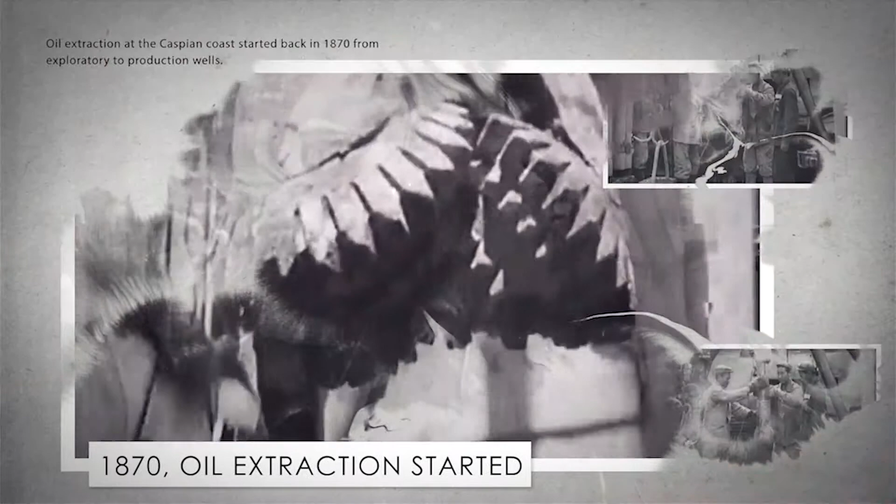The Caspian Sea is a pearl of Europe and Asia. For as long as anyone can remember, its waters have been bringing life to people living at the coast. The Caspian Sea has always been famous for rich fishery resources, but it houses something even bigger: vast deposits of oil and gas. Oil extraction at the Caspian coast started back in 1870, from exploratory to production wells. In 1901, more than half of the world's oil production was coming from the Caspian oil fields.

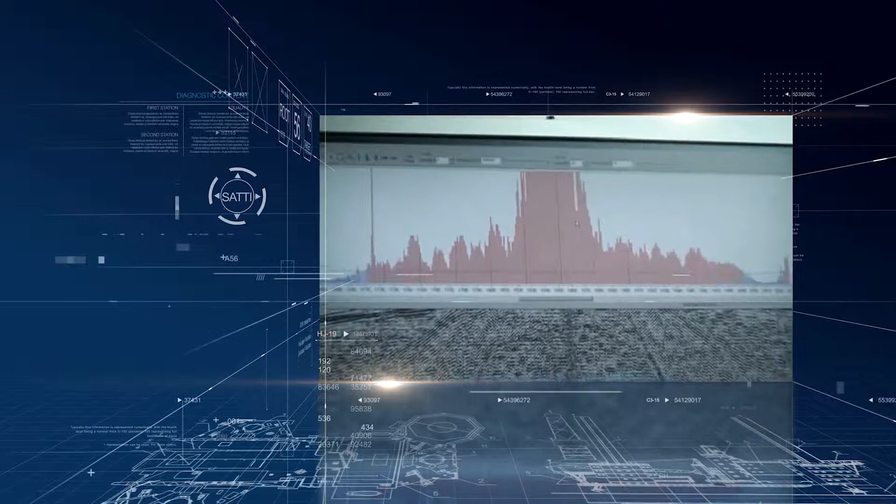Oil exploration and production methods in the early 20th century allowed extracting oil only onshore. The first offshore oil structures opened in the 1950s, bringing new technologies into the region. Northern and central parts of the Caspian Sea, now belonging to Kazakhstan and Russia, had not been explored well at that time. Detailed exploration started in the mid-1990s and led to the opening of the richest fields, making Kazakhstan third in the world in oil and gas reserves.

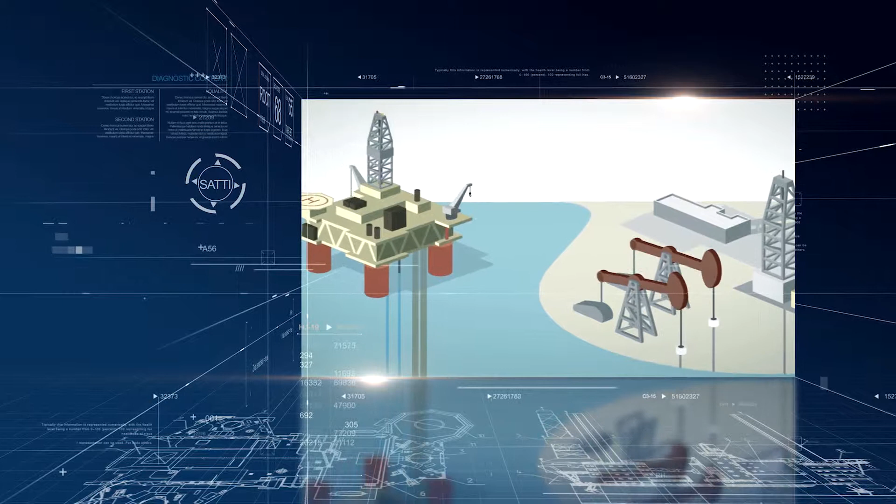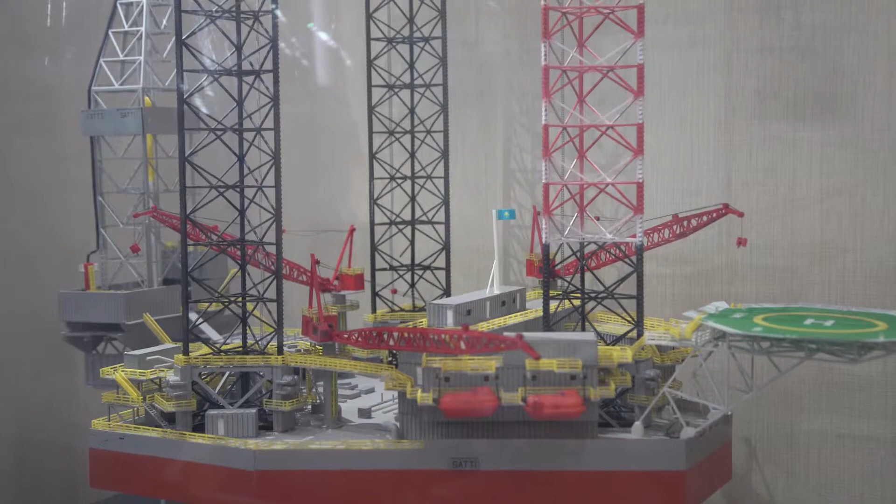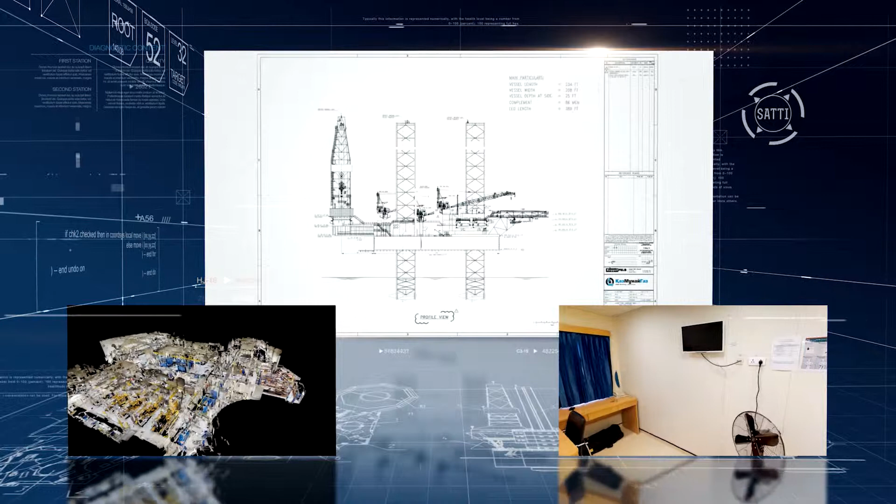Currently, almost all onshore fields are in operation, and many of them are depleted. The situation prompted exploration of offshore oil fields. Considering an increasing demand for oil field development, in 2012 the national company KazMunayGas encouraged KMG Drilling and Services to proceed with construction of the first jackup rig, later named SATTI, translated from Kazakh as successful. In 2017, all testing and pre-commissioning activities were completed, and the rig is fully ready for operation.

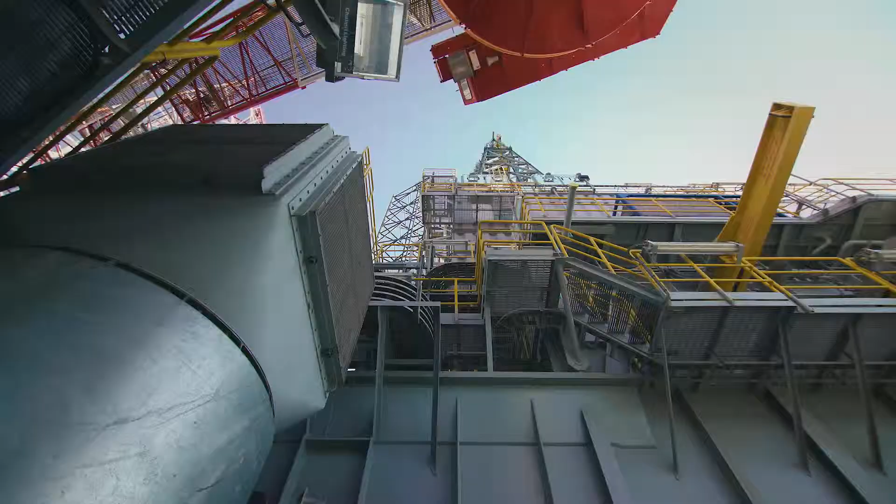SATTI is designed by Keppel FELS as a Type B jackup drilling rig. SATTI is a non-propelled drilling rig, International Maritime Organization (IMO) certified and classified by the American Bureau of Shipping (ABS) as a self-elevating floating drilling unit. IMO number is 9668207, and the call sign is UNDH. The port of registry is Aktau, Kazakhstan. SATTI is owned by KMG Drilling and Services.

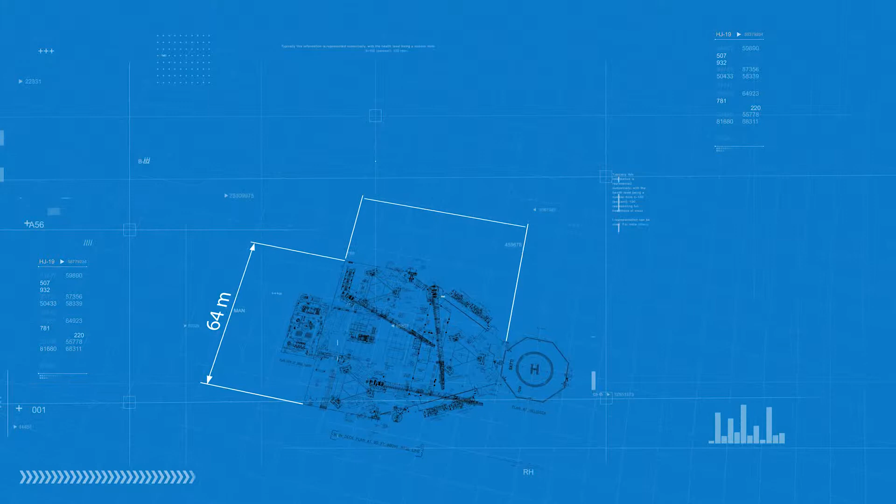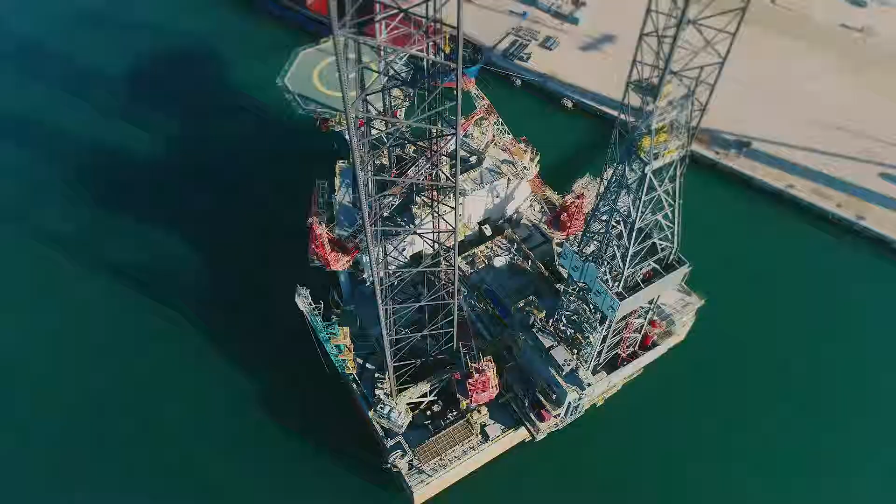SATTI's hull is 72 meters long and 64 meters wide, with three 119-meter-tall legs at a displacement of 10,800 tons. The rig is designed for operation in water depths of 5 to 80 meters and can drill to depths of 7,000 meters. The transit draft is 4.4 meters.

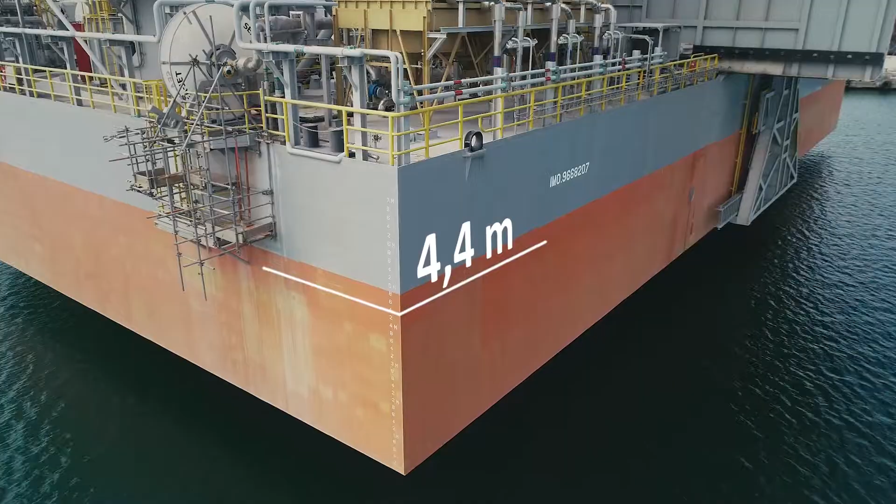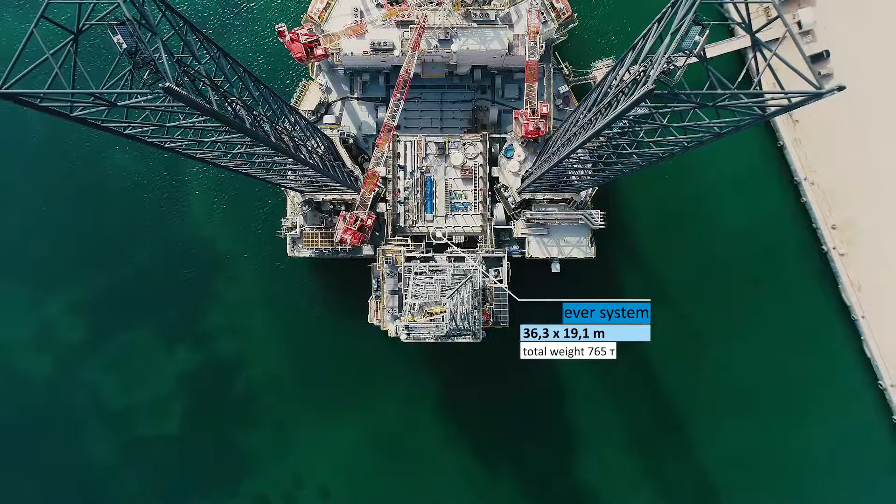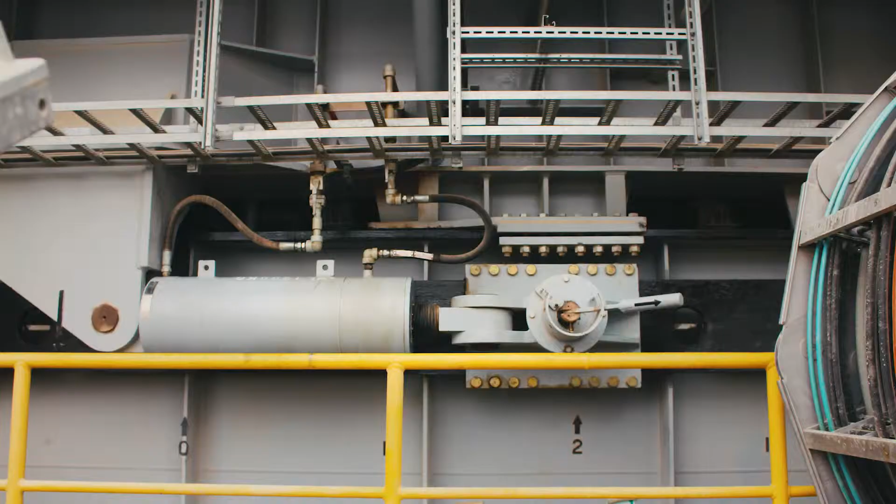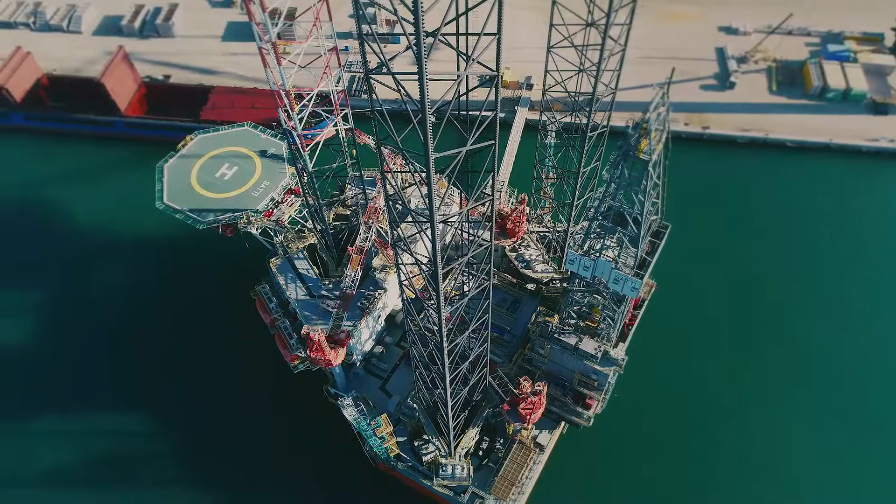The cantilever is located at the aft end of the rig. It is 36.3 meters long and 19.1 meters wide, with a total weight of 765 tons. The drill floor is located above the cantilever. The cantilever can move forward and aft. The rotary table's center line can overhang 18.29 meters from the aft of the rig. The drill floor can move 4.57 meters left or right from the center. The main drilling equipment of the rig is located here, namely the drill floor, derrick, top drive system, drawworks, etc. These features allow for cluster drilling while jacked up in the same position.

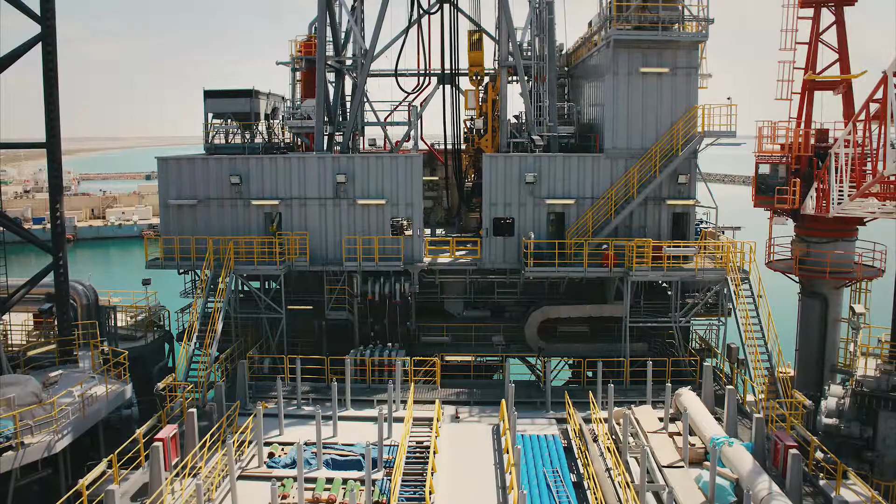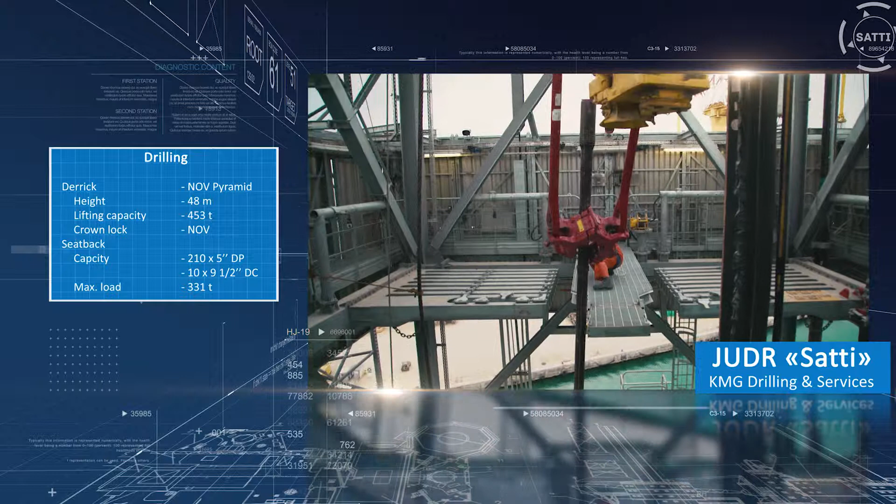The derrick is 48 meters high with 453 tons capacity and equipped with an NOV crown block. The setback area has a capacity of 210 drill pipes with 5 inches in diameter and 10 drill collars of 9.5 inches in diameter.

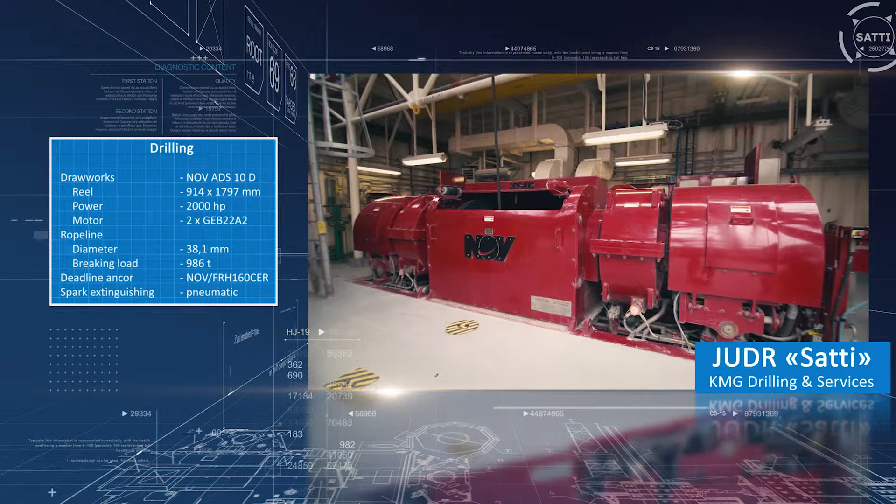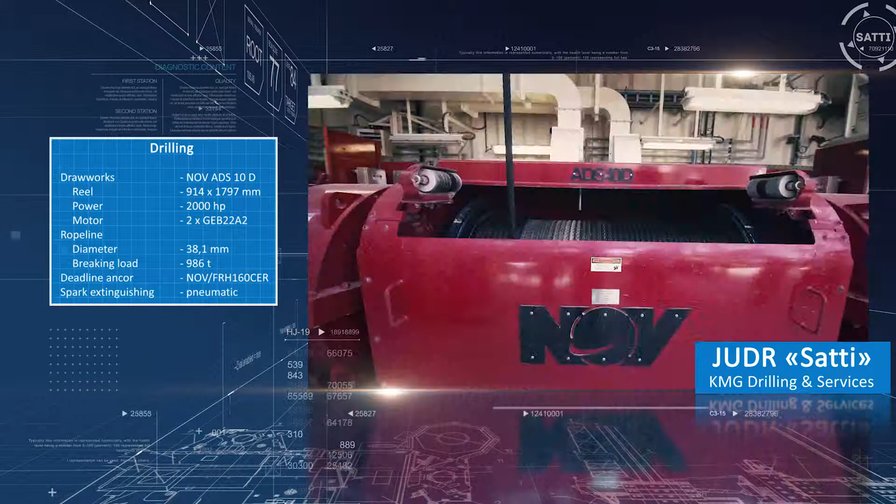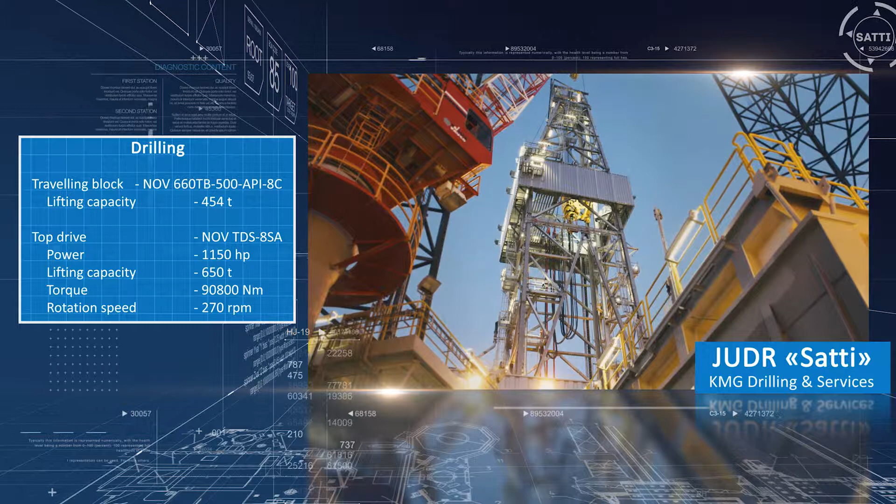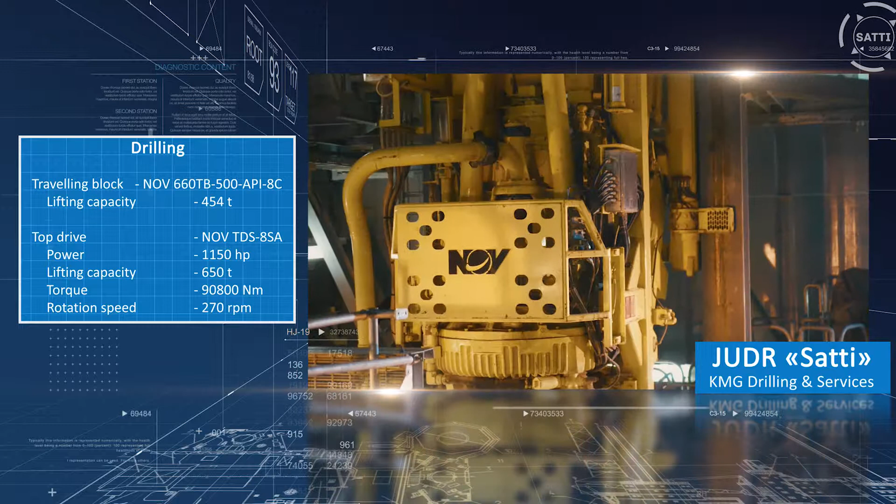The NOV Drawworks is a 2,000 horsepower ADS 10D model, equipped with an Amphion-controlled electrical braking system with air and water cooling. The NOV Traveling Block has a load capacity of 454 tons. The NOV TDS 8SA top drive has 650 tons load capacity, 1,150 horsepower, and 270 rotations per minute.

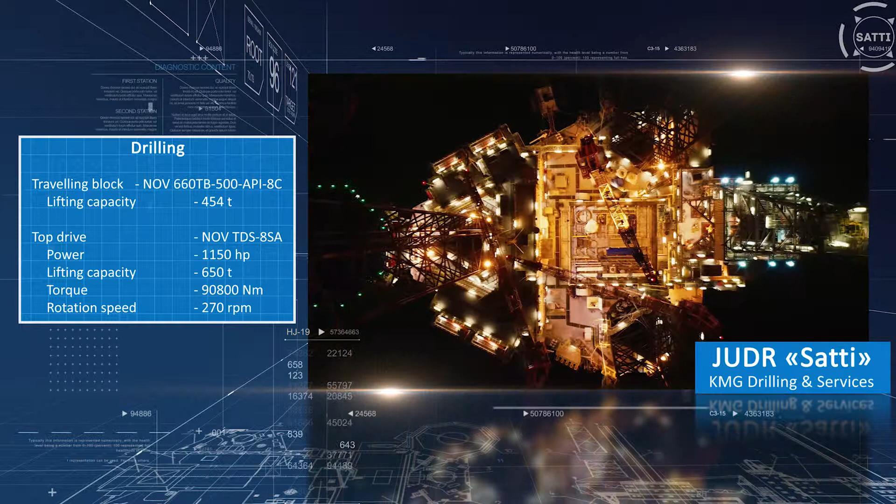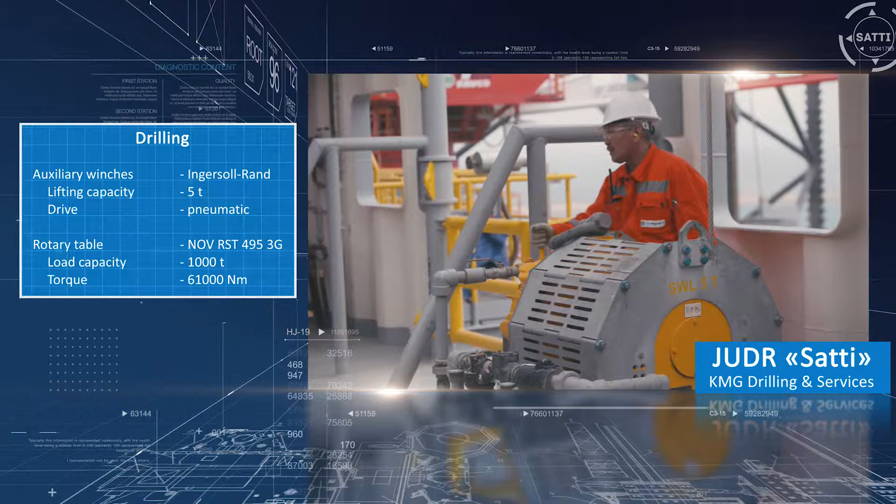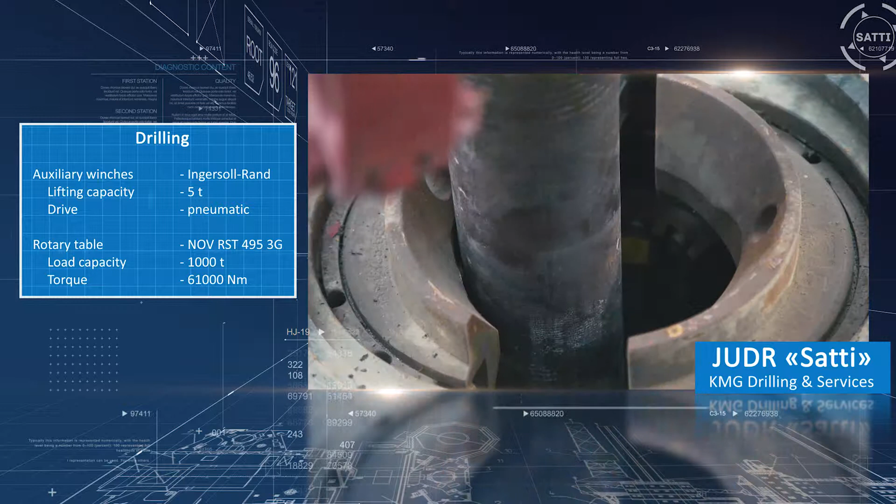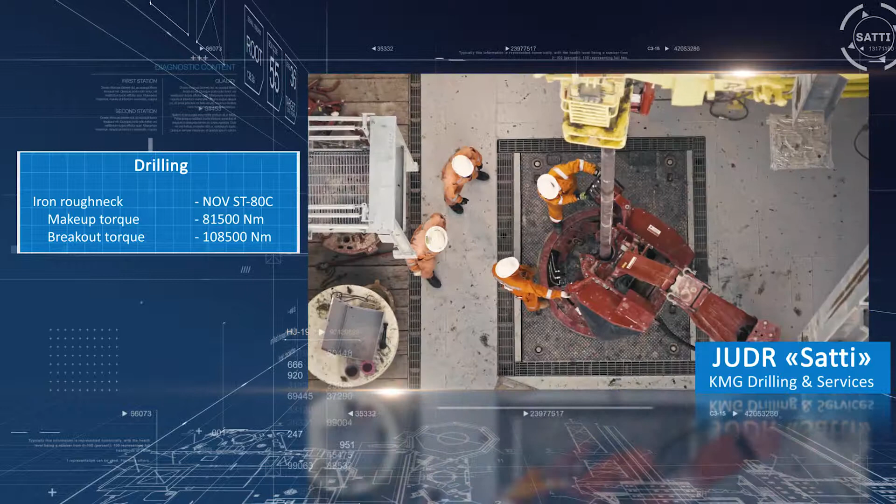For any auxiliary works and cargo hauling, 5-ton lifting capacity Ingersoll Rand air winches are installed on the drill floor. The NOV Rotary Support Table, RST-495-3G, 49.5 inches, is equipped with a removable PS21 power slip. The NOV ST80C Iron Roughneck is installed at the drill floor and has a maximum makeup torque of 81,500 Newton meters and breakout torque of 108,500 Newton meters.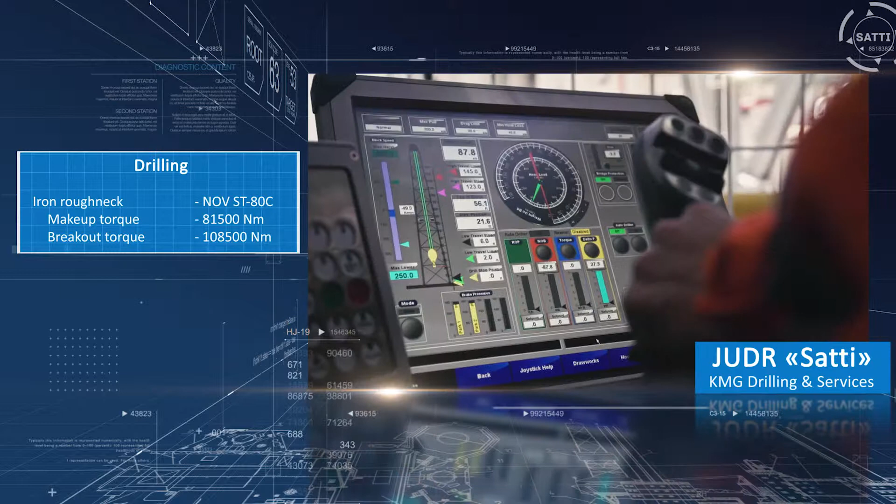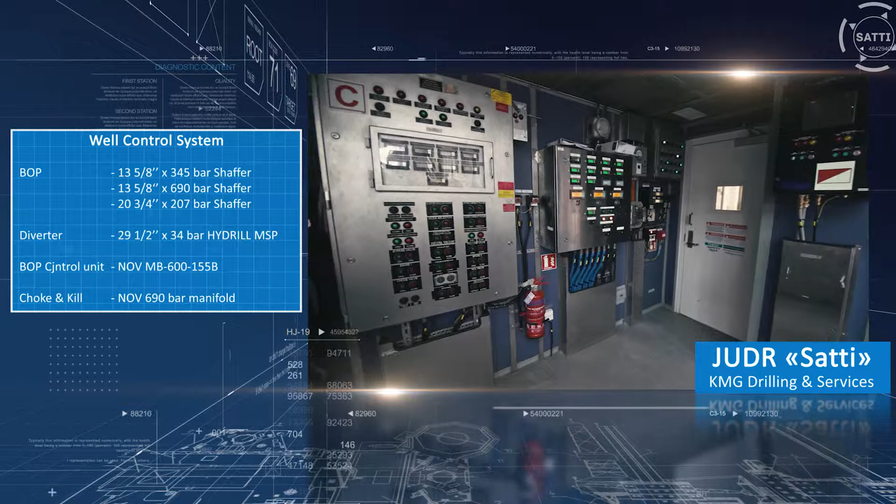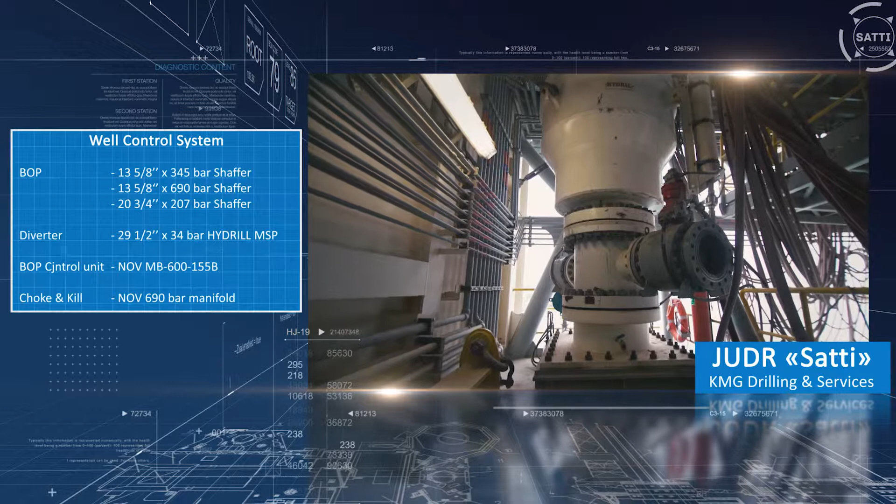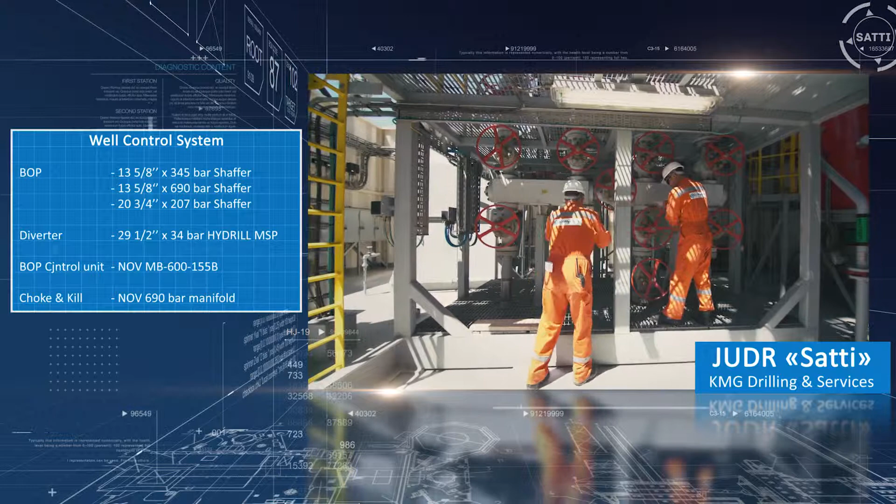The driller's cabin is equipped with an Amphion drilling control system that controls and displays information on the drilling equipment operation and status of drilling operations. There are also control panels for well control equipment, fire and gas detection, CCTV monitoring, and all intercom systems. Blowout prevention equipment includes Shaffer 29.5-inch Hydril diverter, 20 3/4 and 13 5/8 preventers, and NOV choke and kill manifolds which are able to shut the well up to 690 bar.

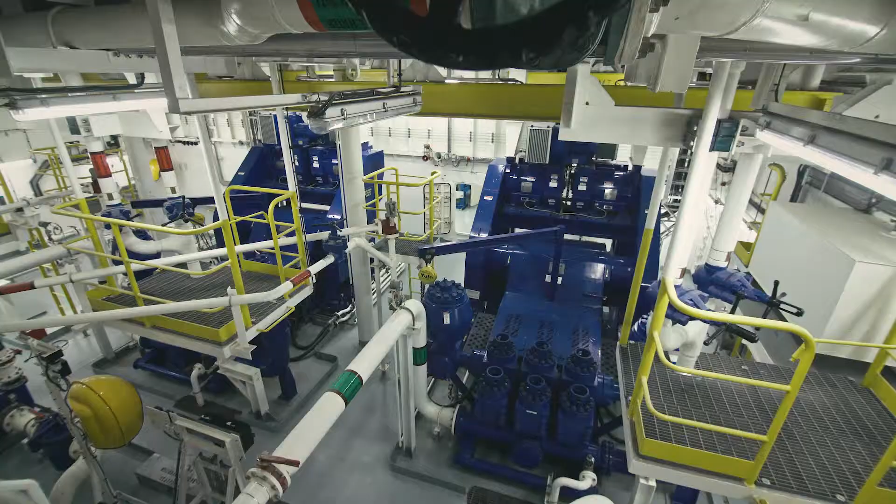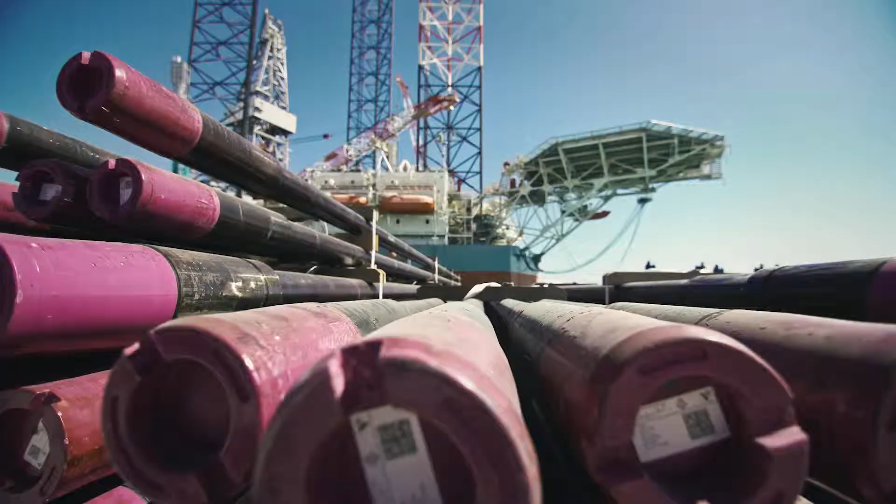NOV 12P 160 mud pumps. Rated pump speed is 120 strokes per minute. Liners from 4.5 to 7.25 inch. Rated pressure 345 bar. An adequate supply of drill pipes and drill collars are available on SATTI. The rig has drill pipes 4 and 5 inches and drill collars from 4 3/4 to 9.5 inches in diameter.

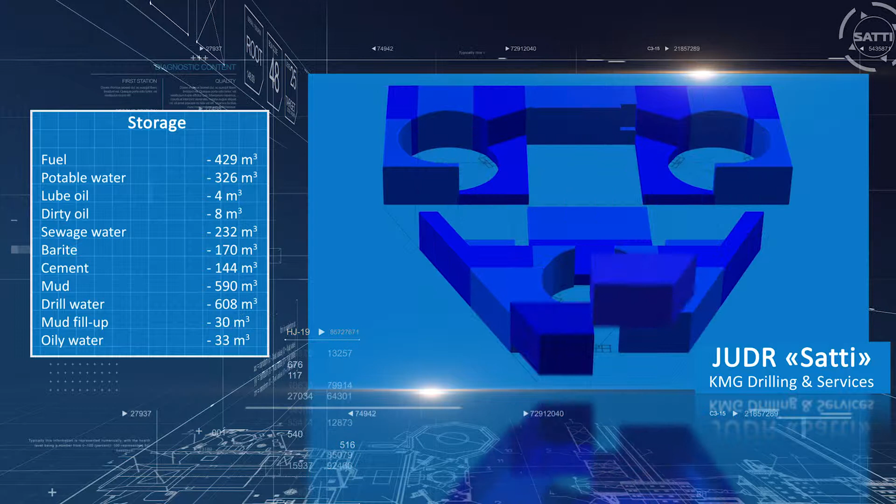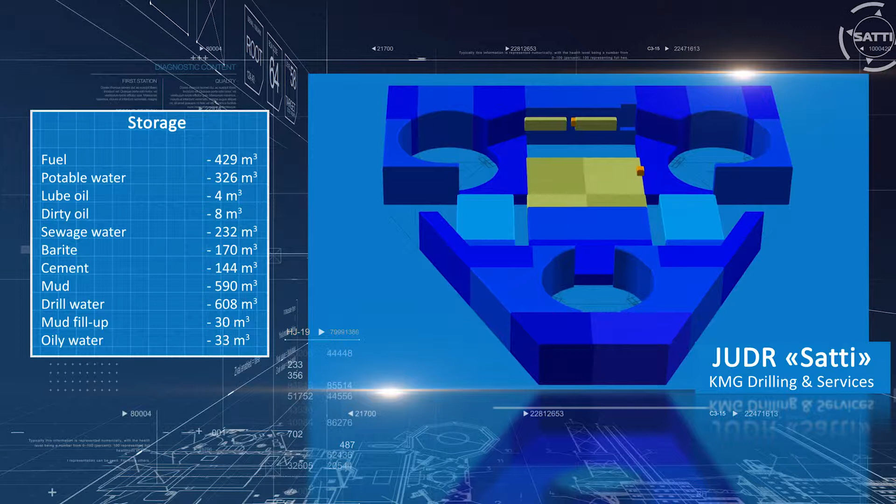Lower level of the hull is designed to store process fluids. There are 2 main, 2 service, and 2 settling tanks for diesel fuel. 2 freshwater tanks with a capacity of 326 cubic meters. 2 4 cubic meter tanks are used to store lubricating oil for diesel generators and mud pumps. Waste oil is stored in an 8 cubic meter tank. For gray and black water collection, there is a 232 cubic meter tank.

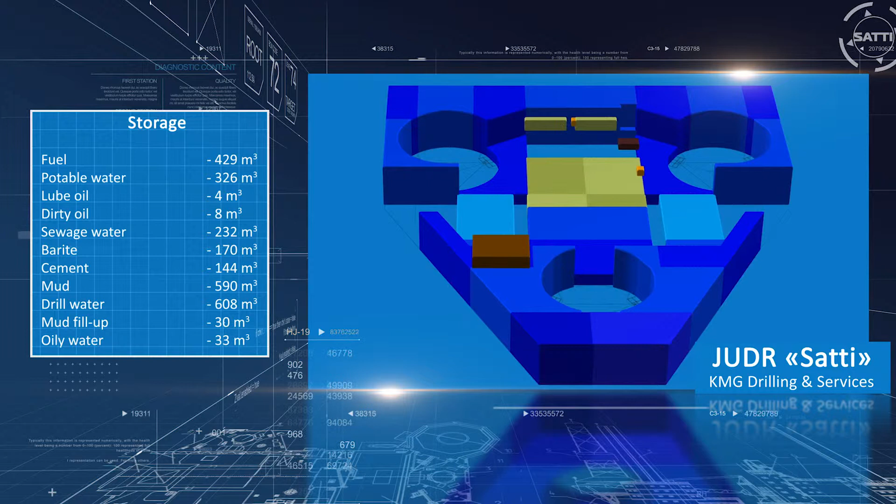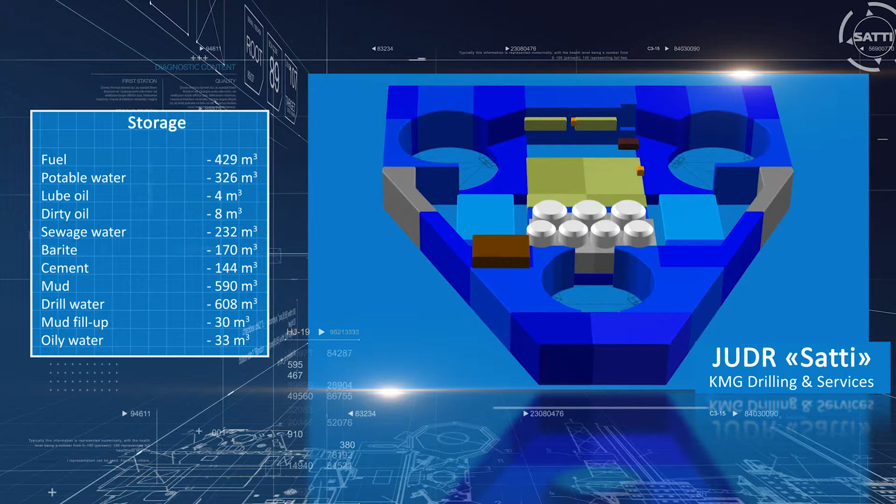For the preparation of weighted drilling mud, 10 mud tanks with overall capacity of 590 cubic meters are installed. 4 bulk tanks for barite with overall capacity of 170 cubic meters, 3 bulk tanks for cement with an overall capacity of 144 cubic meters, and 2 drill water tanks with a total capacity of 608 cubic meters are available. There are 2 tanks for drilling mud fill-up, 30 cubic meters of total capacity, and a 33 cubic meter tank for oily water collection.

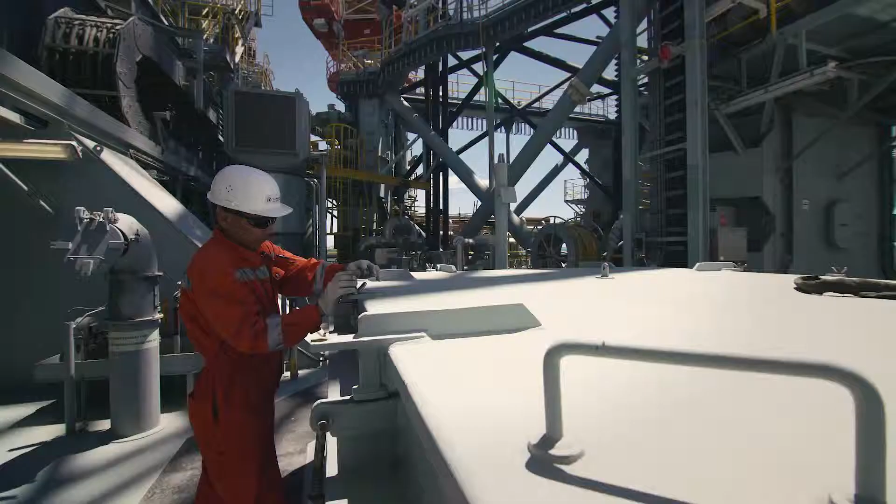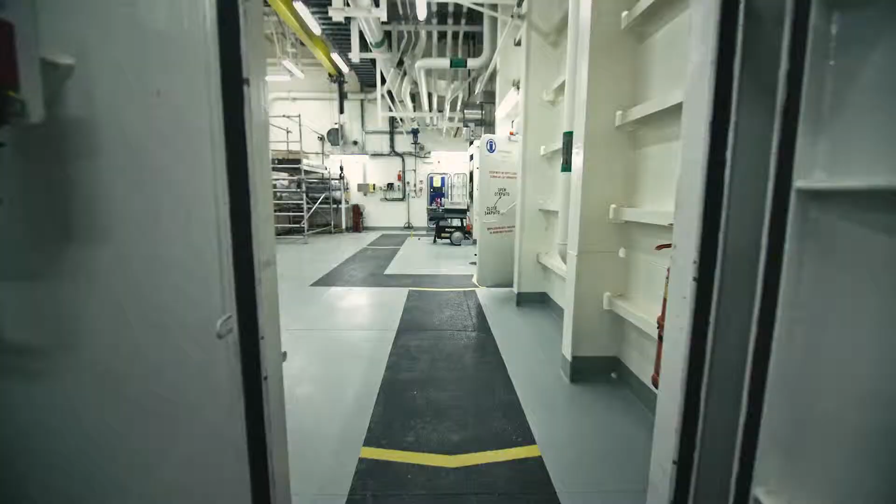There are 3 storage facilities on the rig. The main warehouse, storage for heavy tools, and sack storage room for chemicals.

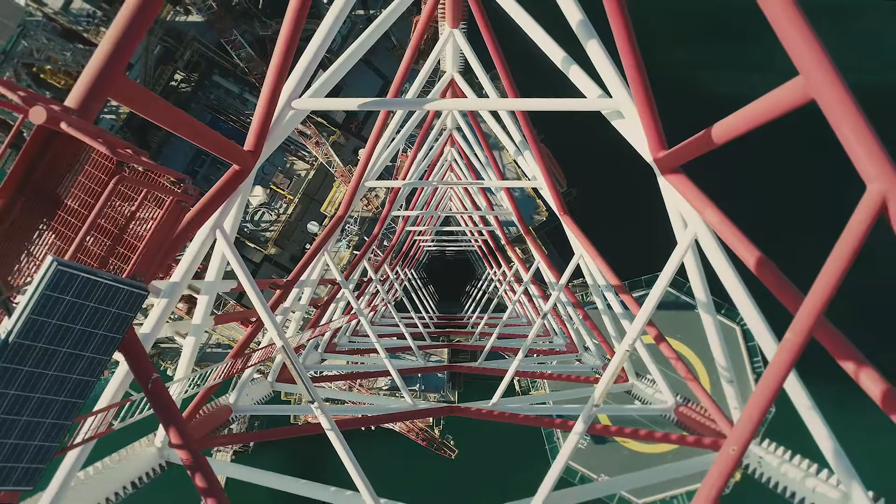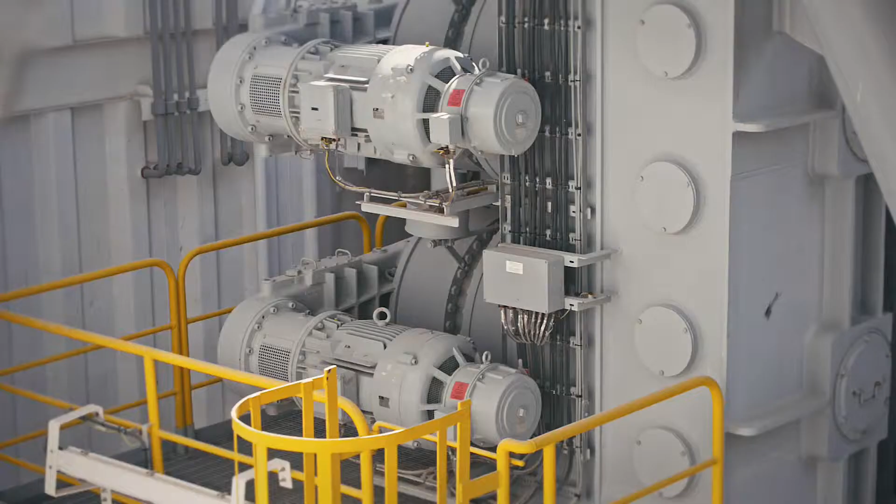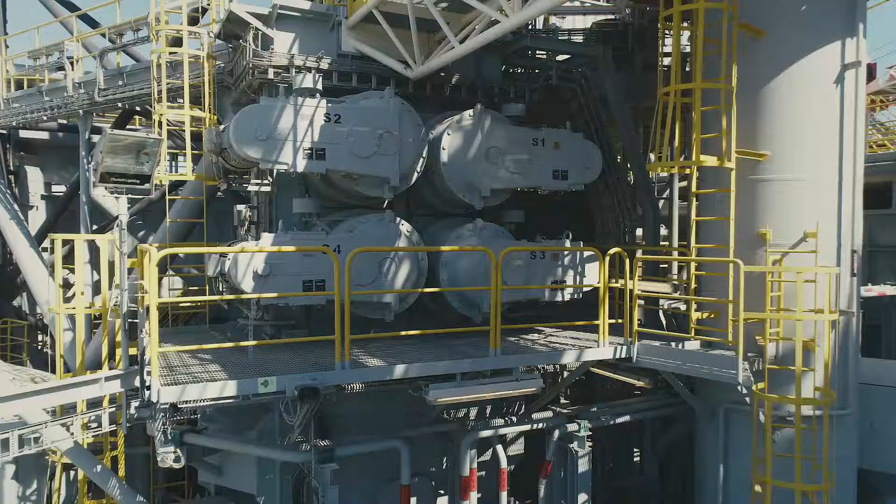The jacking system consists of 3 triangular truss legs with spud cans mounted at the bottom of each of them. Each chord of each leg consists of 4 gears driven independently by electric motors through a gear transmission. Each leg has 12 electric motors with gearboxes for a total of 36 elevating devices. The jacking system has 9 hydraulic fixation units used once the required elevation above sea level is reached.

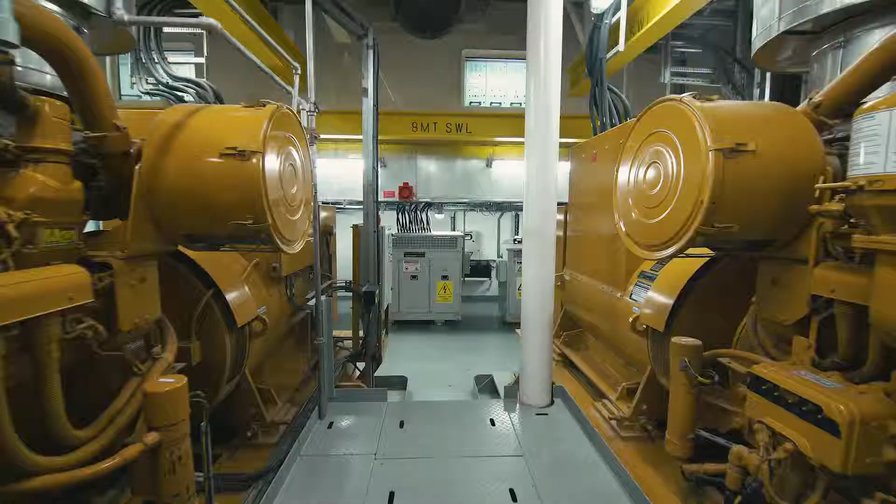Power supply system includes 4 Cat 3516C diesel generator sets rated at 1,505 kilowatts, producing 600-volt output. In case of unexpected blackout, a Cat 3508 emergency diesel generator rated at 968 kilowatts and 480 volts output automatically comes on, ensuring power supply for all emergency equipment on the rig.

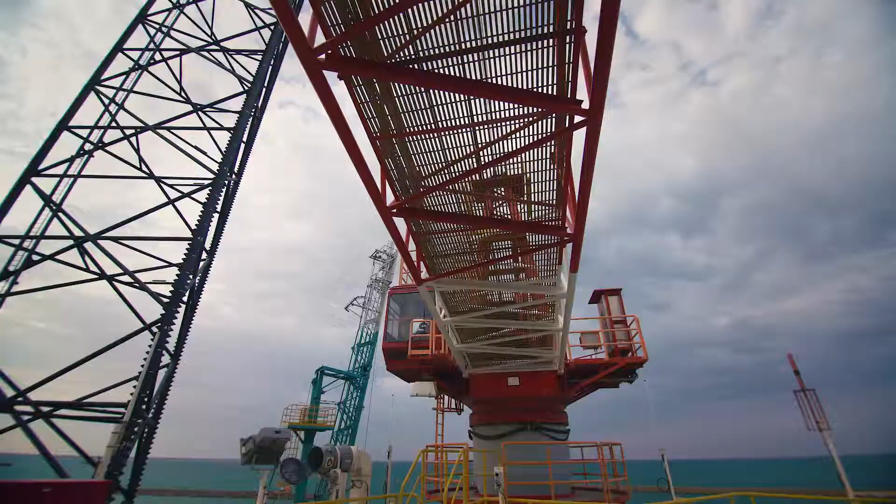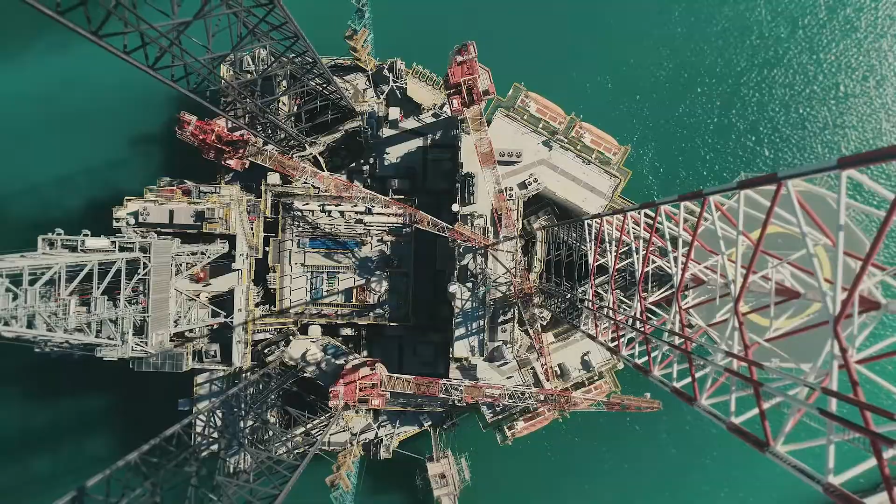3 Favelle Favco pedestal cranes with 36.6 meters long booms are installed on the main deck at port forward, port aft, and starboard locations. The maximum working capacity of each crane is 36 metric tons. At the maximum reach of 36.6 meters, the main hoists of the cranes have a working capacity of 13 metric tons each. The whip hoists have a working capacity of 10 tons.

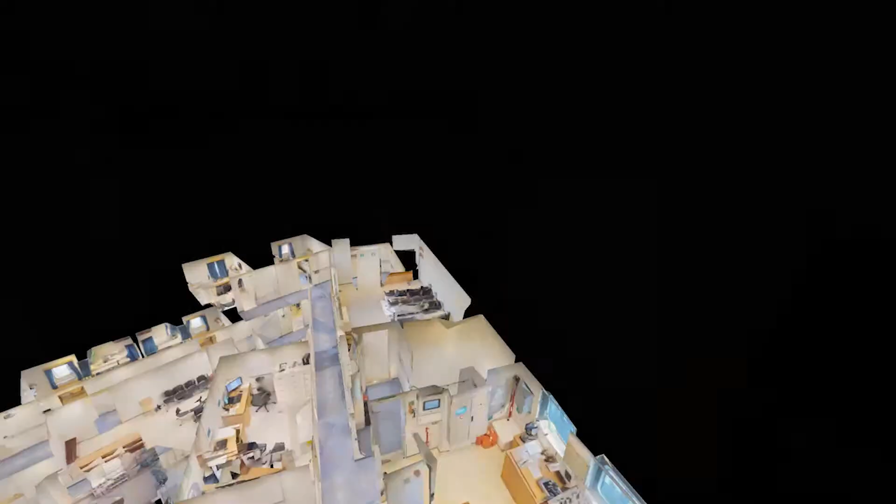The living quarters have been designed to provide comfortable conditions for work and rest. The living quarters can accommodate 86 personnel and are located the maximum distance from the drill floor and flare booms. To provide accommodation for rig personnel, 6 single, 12 double, and 14 quadruple cabins are available. All cabins are designed to provide comfortable living environments and have en-suite bathrooms.

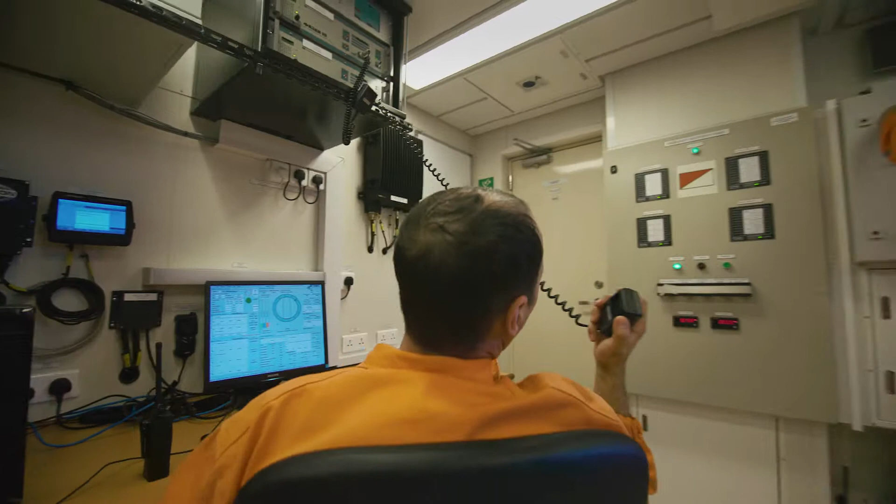The Offshore Installation Manager Office, Company Man Office, jacking control room, server room, radio room, helicopter lounge, meeting room, and other office rooms are located on the upper levels of the living quarters. The galley is fully provisioned with all the equipment required for food storage and cooking. The walk-in cold storage, refrigerators, and freezers can store food supplies sufficient for 86 people. The mess room can accommodate 48 people at a time.

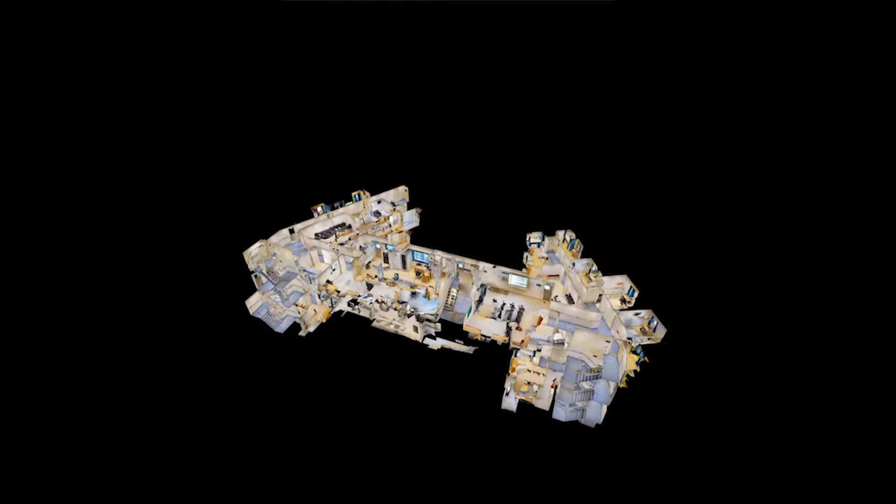SATTI has recreational facilities where personnel can relax during their time off: coffee rooms, fitness gym, recreation room, library, and computer room are located on various levels within the living quarters. There is a sick bay on the rig where personnel can be referred for first aid and an isolation unit.

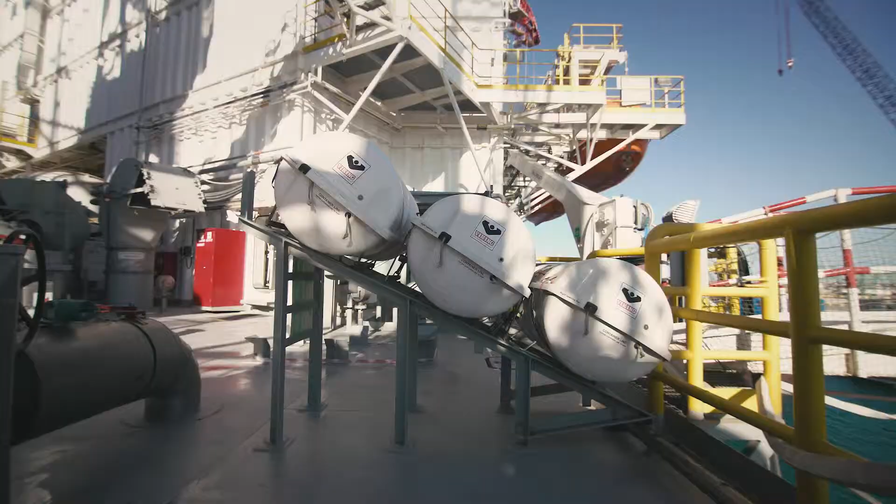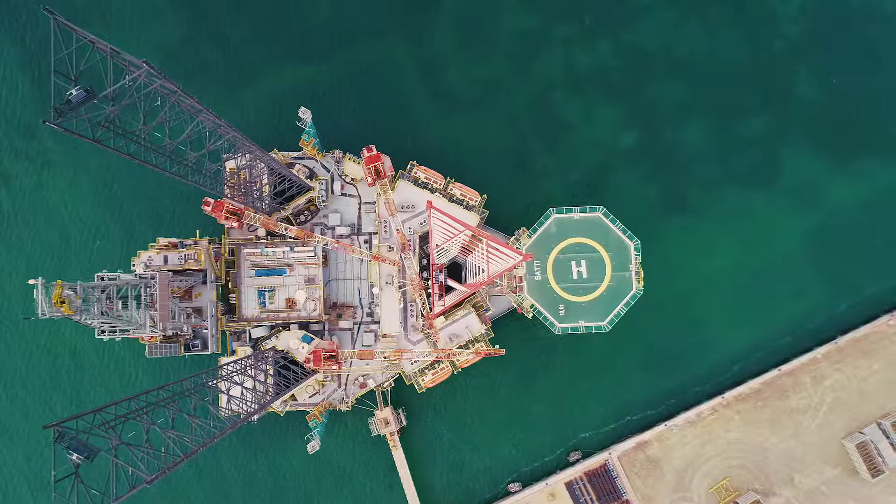There are 4 fully enclosed Norsafe lifeboats with 45 personnel capacity each, located on both sides of the living quarters. There are 6 Viking life rafts with 20 personnel capacity each, located on both sides of the main deck, 3 life rafts per each side. There is a Norsafe fast rescue boat located at the bow.

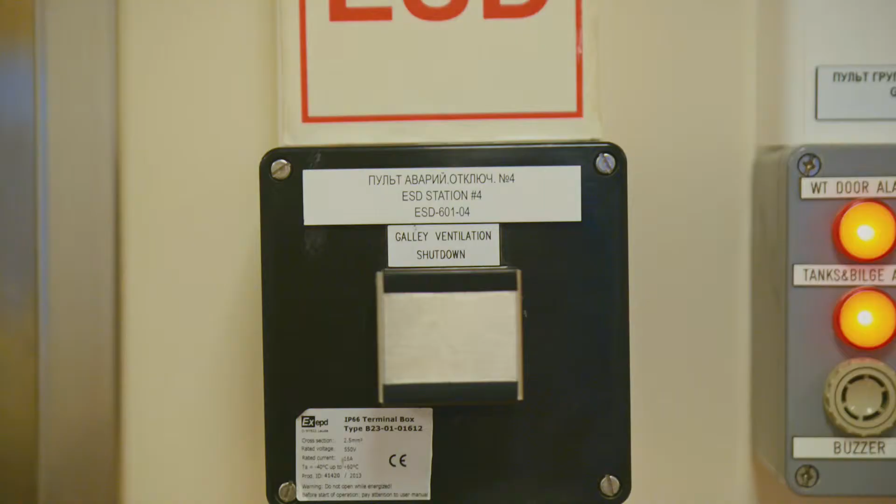SATTI is equipped with an automatic fire and gas detection system covering the entire rig. Gas, heat, smoke, flame, and toxic gas detectors are connected to the automatic fire and gas detection system. Upon activation of the fire and gas alarm, the living quarters damper emergency shutdown system is activated. The helideck is located on the bow of the rig, 22 meters above the main deck, and is 25 by 25 meters with a load capacity of 13 tons.